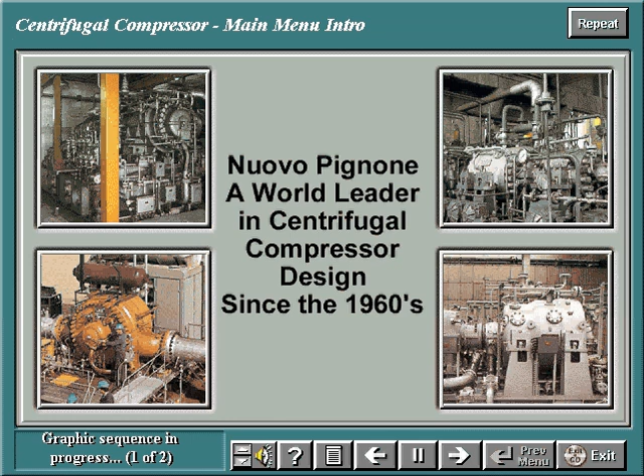In order to more easily recognize the various types of Nuovo Pignone centrifugal compressors, it is important to understand the basic function of a centrifugal compressor.

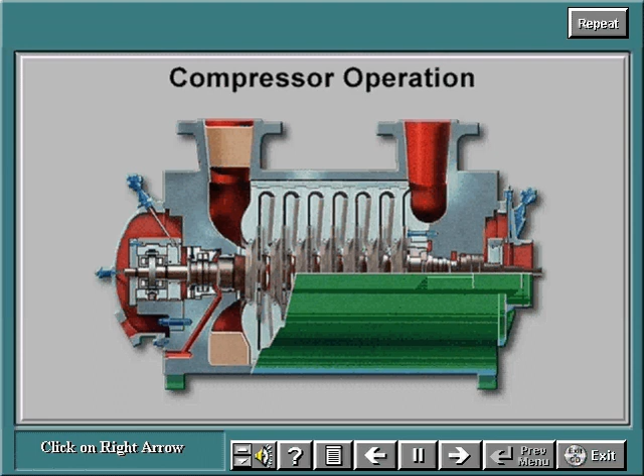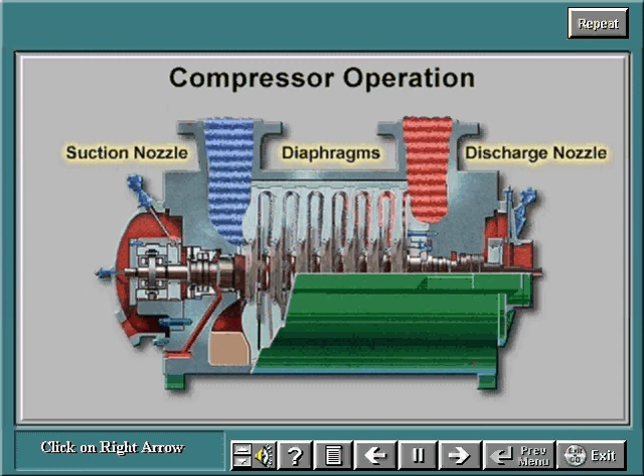In a centrifugal compressor, a continuous flow of fluid increases its pressure by means of energy given by impellers arranged on a rotating shaft. This type of machine is composed of an outer casing, which contains the diaphragms and a rotor. The rotor draws gas from the suction nozzle through the impellers, across the diaphragms to the discharge nozzle located on the opposite end of the compressor.

The major components of a centrifugal compressor can be divided into two functional areas. The first functional area includes the stationary components consisting of the casing, the inlet and discharge nozzles, the inlet and discharge volutes, the inlet, intermediate, and discharge diaphragm sections, the shaft end seals, the journal bearings, and the thrust bearing.

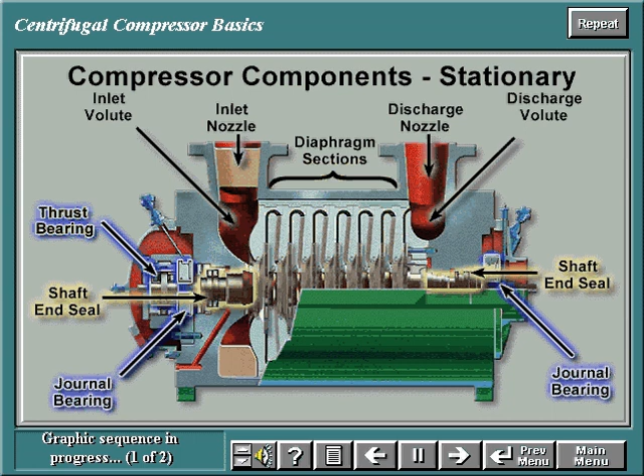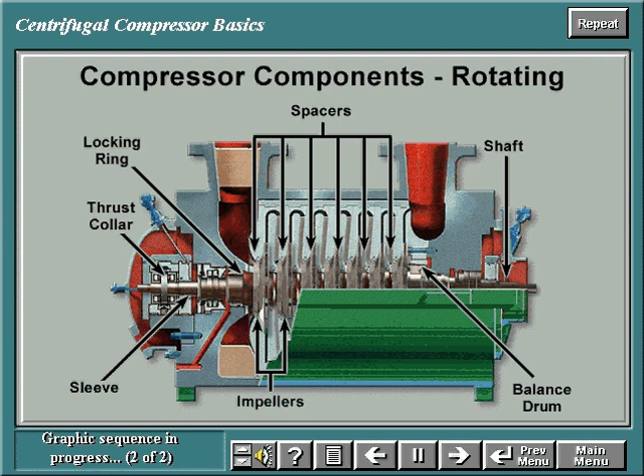The second functional area includes the rotating components consisting of the impellers, the shaft, the balance drum, the spacers, the seal sleeves, the thrust collar, and the locking rings.

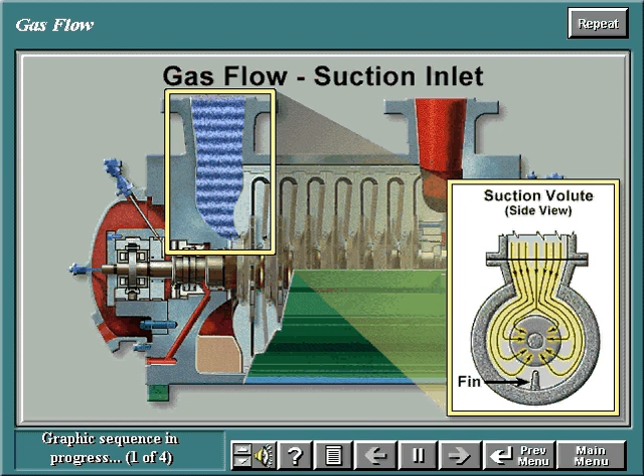Gas flow enters the inlet volute of the compressor through the suction nozzle. The volute ensures uniform distribution of the gas around the eye of the impeller. In the volute, directly opposite the suction nozzle, is a fin that reduces gas turbulence and prevents recirculation within the volute itself. From the inlet volute, the gas is then drawn into the eye of the impeller and is discharged

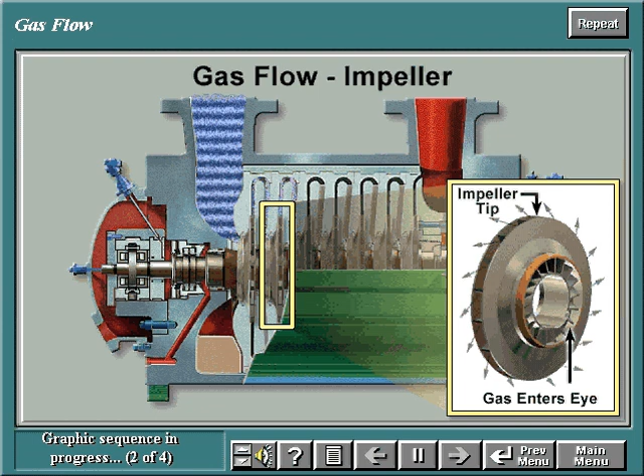radially at a higher pressure, temperature, and velocity from the tip of the impeller. The impeller contains blades that convert the mechanical energy of the shaft into gas energy. This energy can be measured in terms of pressure, temperature, and velocity.

The high-velocity gas flows from the impeller into the stationary components downstream, whose surface defines a diffuser. In the diffuser, part of the gas velocity is reduced. Following the diffuser is a return channel that brings the gas to the eye of the next impeller.

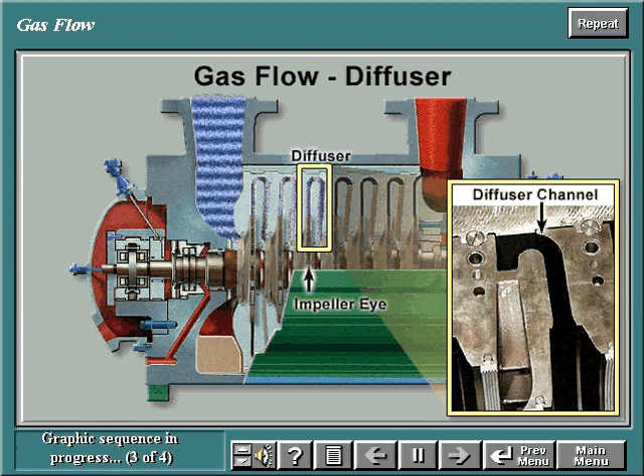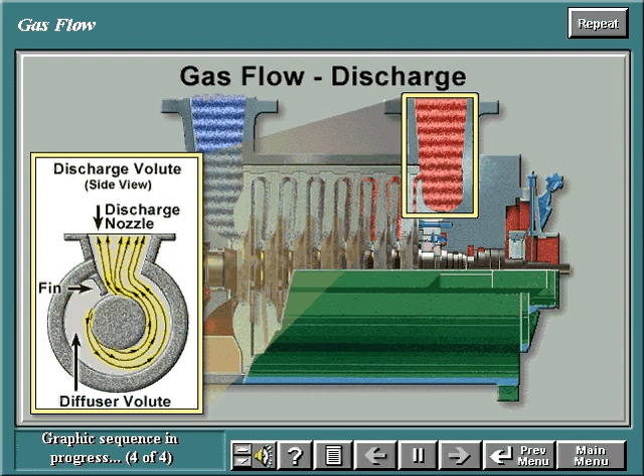Upon leaving the last diffuser, the gas flows into the discharge volute and is directed toward the discharge nozzle. The discharge volute contains a fin, similar to the fin in the inlet volute, that reduces gas turbulence and prevents the gas from continuing to flow around the volute.

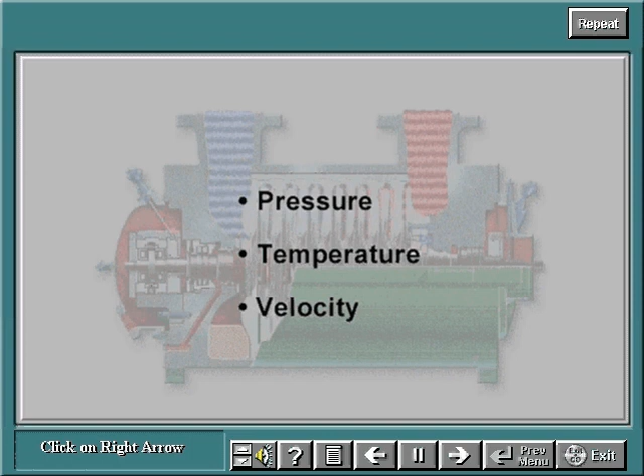The increased energy in a gas is defined by the characteristics of pressure, temperature, and velocity. These three characteristics are used to determine a quantity known as enthalpy. Enthalpy depends only on the condition of the fluid and measurement of the energy content of the gas.

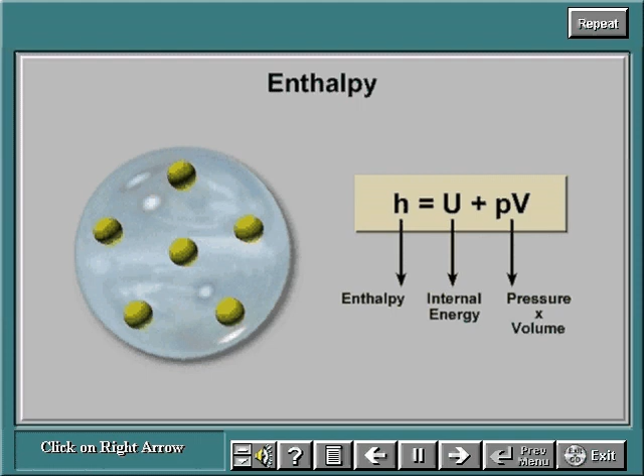Thermodynamic properties of the gas can be static or total. The difference between the two is that the total condition includes the energy content generated by gas velocity. Thermodynamics includes the concepts and laws describing the conversion of energy from one form to another, and the study of how these forms of energy interrelate.

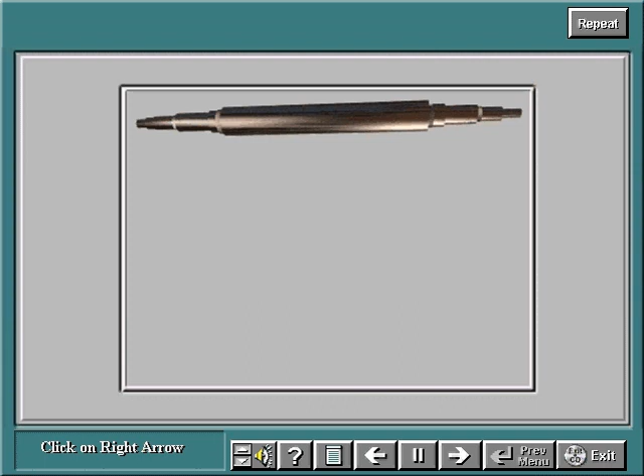The assembly of the rotor begins with the installation of the sleeves to the area of the shaft where the oil seals will make contact.

Next, the locking ring is threaded onto the shaft at the balance drum end. Then, the balance drum is installed and shrink-fitted on the shaft against the locking ring using double keys. Finally, the discharge impeller is installed and shrink-fitted on the shaft against the balance drum using double keys.

Then the partial assembly is dynamically balanced. After the partially assembled rotor has been balanced, a spacer is installed, the next impeller is added, and both are heat shrink fitted to the shaft. Then the rotor assembly is balanced again.

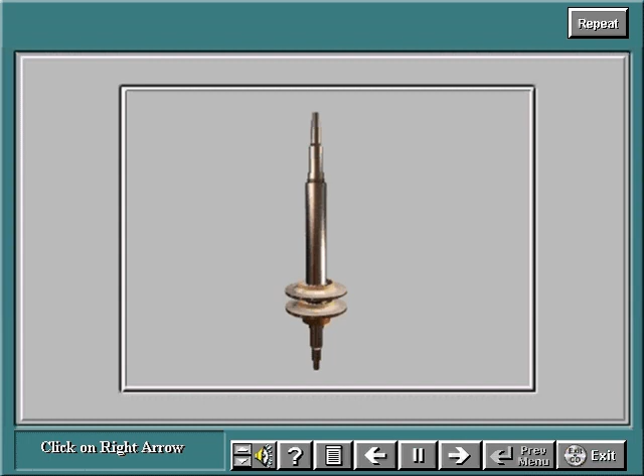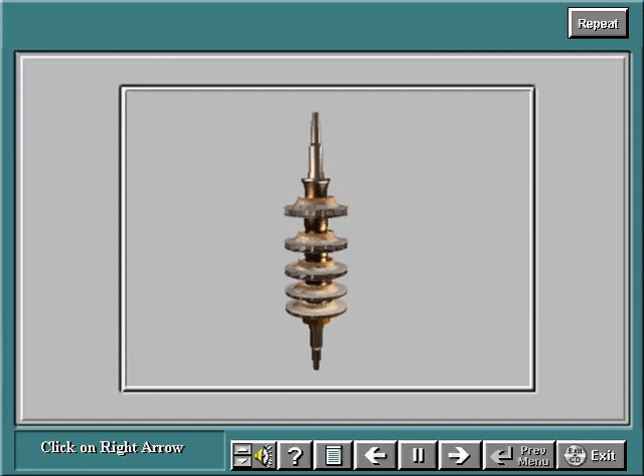The sequence of balancing the rotor, installing the spacer, and adding the impellers is repeated until the suction impeller, spacer, and locking ring are installed and balanced as defined by the customer requirements. Generally, the thrust collar is added last. It is hydraulically expanded and pressed into position on the end of the shaft.

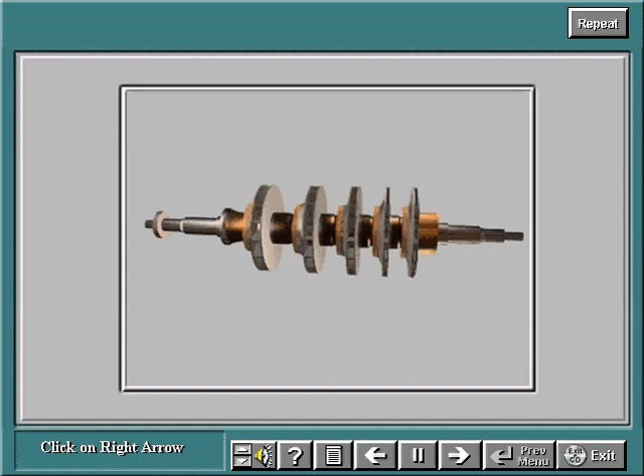The assembly of a BCL compressor begins with the insertion of the diaphragms into the counter casing. Because both the counter casing and diaphragms are horizontally split, each half of the counter casing receives the diaphragm halves. Each half is lowered into place and positioned axially by the counter casing shoulder.

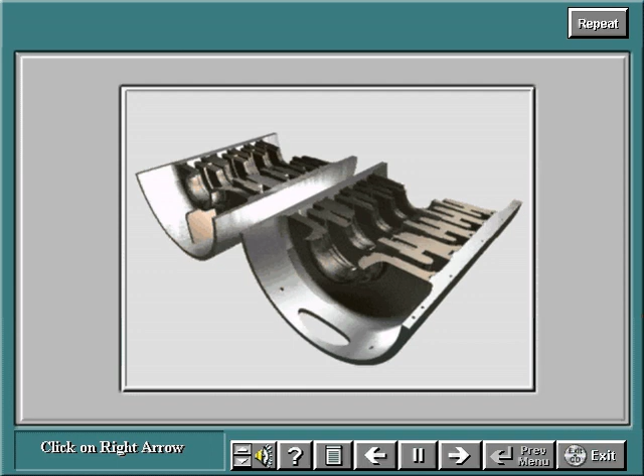The diaphragms in the upper half of the counter casing are locked in place using cap screws so they do not fall out when the upper half of the counter casing is placed on the lower half.

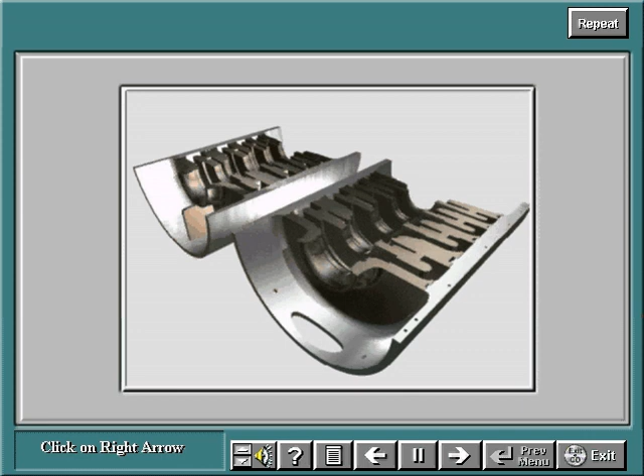After the diaphragm halves have been mounted into the counter casing and placed in position, the labyrinth seals are installed in the diaphragm sections. The labyrinth seal segments for the impeller eye and foot are rolled into L grooves in each of the diaphragms.

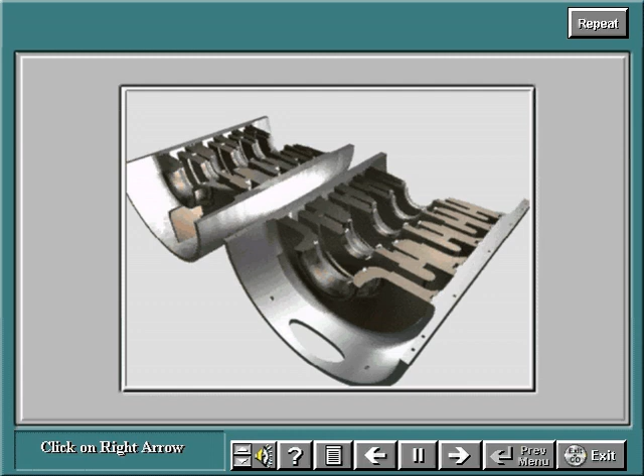The labyrinth seals in the upper half of the counter casing are locked in place using cap screws so they do not fall out when the upper half of the counter casing is placed on the lower half.

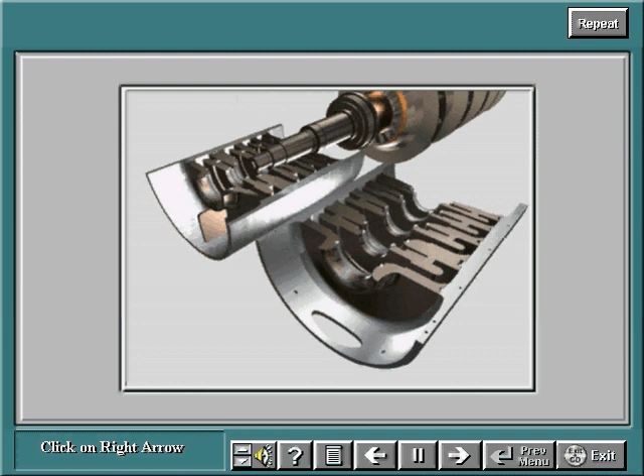The rotor assembly is inserted on the lower half diaphragms and rests on the lower half labyrinth seals. Then the axial position of the rotor is set and recorded.

Next, the upper half of the counter casing is placed on top of the installed rotor and lower counter casing half. Before closing the counter casing halves together, O-ring segments, coated with lubricating grease, are fitted into position on the middle split plane of the lower diaphragm to minimize leakage between compression stages.

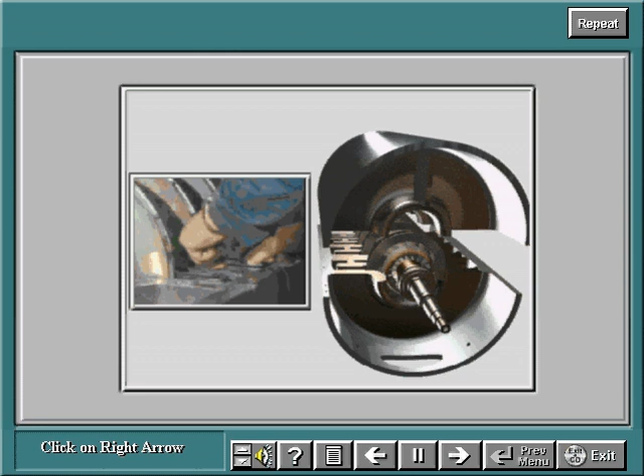Great care must be taken to ensure a perfect fit between the two halves to avoid internal damage to the rotor and diaphragm.